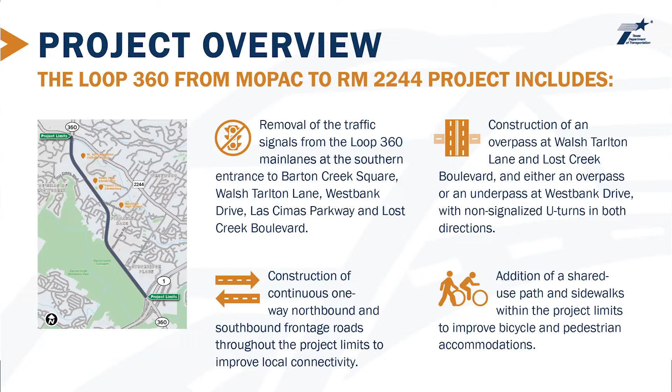As you know, Loop 360 has experienced a severe amount of congestion over the years, and as the population grows, that traffic is only going to get worse. This project will improve safety and mobility on Loop 360 between MoPac and RM 2244 by removing the traffic signals from the Loop 360 main lanes throughout the project area and replacing them with overpasses or underpasses at Walsh Tarlton Lane, Westbank Drive, and Lost Creek Boulevard. Constructing continuous one-way northbound and southbound frontage roads to improve local connectivity, and adding shared use paths and sidewalks to improve bicycle and pedestrian accommodations.

During this presentation, I will be giving you an overview of the Loop 360 program, public feedback and schedule to date. We will be walking through proposed details of the project. And this information can all be found on the Loop 360 website, which is loop360project.com. Your input is extremely valuable to the team, and there are 4 different ways that you can comment.

Comments can be received either online at the Loop 360 website, via email, verbally by calling 512-904-3800 and leaving a voice message, or by mail at the address on your screen. Comments must be received by July 23rd, 2020 to be considered part of the formal comment period.

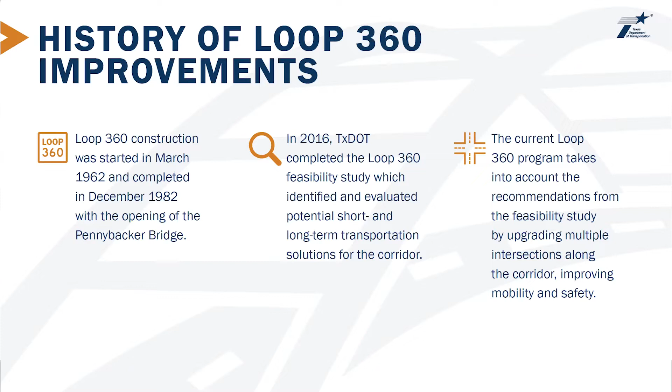Loop 360 has been around for nearly 4 decades. Construction was completed in December of 1982 with the opening of the Pennybacker Bridge. In 2016, TxDOT completed a feasibility study which identified transportation solutions for the corridor. The current Loop 360 program takes into account the recommendations from the feasibility study by upgrading multiple intersections along the corridor to improve mobility and enhance safety.

Community input is also an important part of the process. Through public workshops and meetings with neighborhood and business groups, we've heard the community wants the Loop 360 program to improve mobility and safety for all users, minimize impacts to the environment and the community, balance the needs of through traffic with local access while reducing cut-through traffic in neighborhoods, and address delays at signalized intersections.

Loop 360 experiences some of the heaviest traffic congestion in the area, especially during peak hours. A 2014 traffic study found it took approximately 70% longer to travel on Loop 360 during peak periods compared to free flow conditions. And if nothing is done by 2040, morning peak travel times could increase by an average of 46%, and evening peak travel times could be nearly double the off-peak travel times. Loop 360 from RM 2244 to SH 71 is among the top 100 most congested roadways in Texas. Unless something is done, traffic conditions will get worse as our population grows.

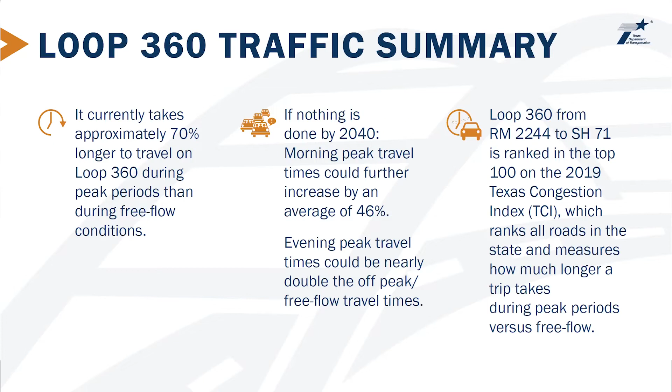The big question most people have is, when will construction begin? Take a look at our program schedule. The map to the right shows the 10 intersections where improvements will be made. They are grouped together into several different projects. We've already started utility relocation on the Westlake Drive Cedar Street project, and construction will begin in 2022. This intersection experiences the most congestion and is the first to move forward. We've ordered the rest of the projects accordingly. As you can see, improvements to the RM 2244 intersection will be handled as a part of a separate project in the program. Environmental work on the MoPac to RM 2244 project began in late 2019.

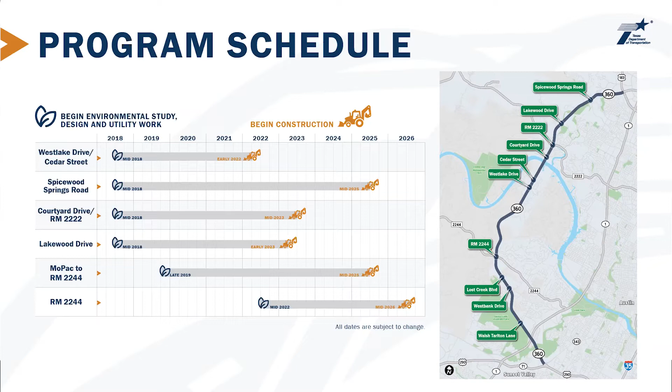We received many questions as to why it takes so long for TxDOT to complete construction for transportation improvements. The Loop 360 program began with the feasibility study, which took 2 years to complete. The next step is planning, environmental, and detailed design, which typically takes between 2 to 4 years to complete. During this part of the project, our team analyzes multiple alternatives, reviews the final version, and comes to an environmental decision. It usually takes about a year for utility relocation. Then the project can move to construction, which typically takes between 2 to 3 years, depending on the project.

I'm going to give an overview of the project and explain its main components, and later we'll take a zoomed in look at the major intersections of the project area. The project runs from MoPac on the south side to RM 2244 or Bee Caves Road on the north side.

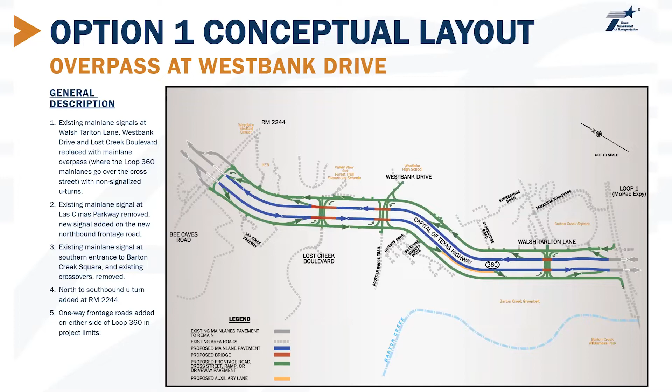Addition of a shared use path and sidewalks within the project limits to improve bicycle and pedestrian accommodations. Option 2 includes all the same things described for option 1. The difference is that option 2 adds an underpass where the Loop 360 main lanes will go under the cross street at Westbank Drive.

Let's talk about how you get from place to place as you drive along Loop 360 in the future. If you're headed southbound on the main lanes, the first exit you would come to, just after you cross over RM 2244, would put you on the southbound frontage road. From there, you can access Las Cimas Parkway, Lost Creek Boulevard, Westbank Drive, and Scottish Woods Trail. As you continue southbound, the second exit allows you to access the Walsh Tarlton Lane intersection as well as southbound MoPac.

If you're already on the frontage road and just want to get onto southbound Loop 360, there are entrance ramps just south of Las Cimas Parkway, south of Westbank Drive, and just south of Walsh Tarlton Lane. To access northbound MoPac from southbound Loop 360, you would stay on the Loop 360 main lanes and take a left at the MoPac intersection as you do today. To access southbound MoPac, you would exit north of Walsh Tarlton Lane and turn right onto MoPac.

If you're headed northbound on the main lanes, the first exit allows access to Barton Creek Square Mall as well as to Walsh Tarlton Lane. If you're coming from southbound MoPac already, you would already be on the frontage road and could easily access the mall and Walsh Tarlton.

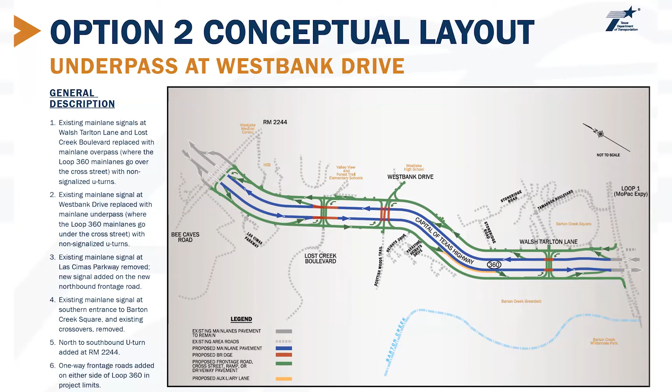As you can see, the MoPac at Loop 360 intersection hasn't changed too much, and you'll still be able to access MoPac very much like you do today. The current project ends at MoPac, so anything south of that won't be considered as part of this project.

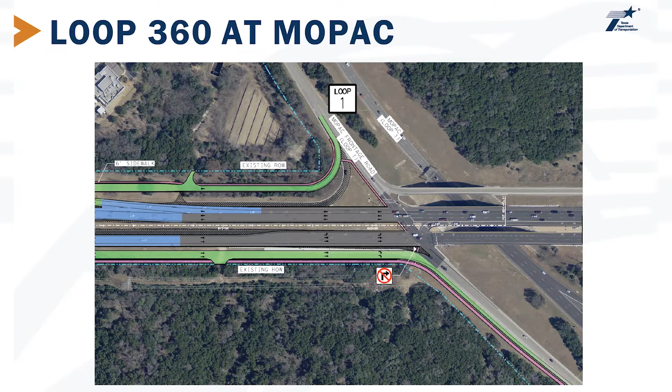An overpass with non-signalized U-turns is proposed for Walsh Tarlton Lane. There are 4 lanes on the northbound frontage road of Loop 360 and 3 lanes on the southbound frontage road. At this point, the shared use path is on the west side of Loop 360. We did that in order to connect the shared use path to existing bicycle and pedestrian facilities on MoPac. On the east side, a sidewalk provides access to Barton Creek Square Mall and connects to the existing sidewalk on Walsh Tarlton Lane.

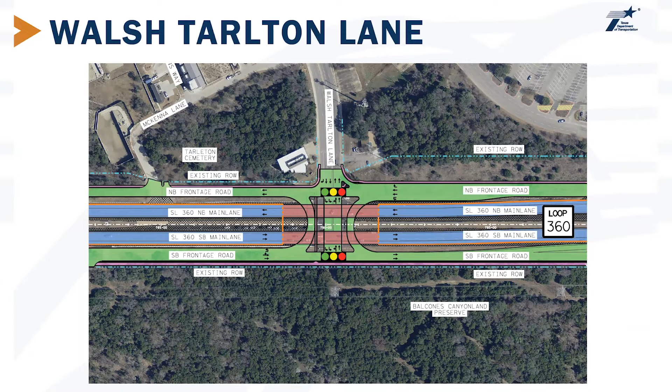Either an overpass or underpass with non-signalized U-turns is proposed for Westbank Drive. The example on the screen shows the overpass option, and this slide shows the underpass option. Regardless of the type of bridge we build, there will be 4 lanes on the northbound frontage road of 360 and 5 lanes on the southbound frontage road.

As you are approaching Westbank Drive from the south, there is a right turn lane that allows for easier, safer access to Westbank Drive. You will note a sidewalk on the east side of Loop 360 and the shared use path on the west side.

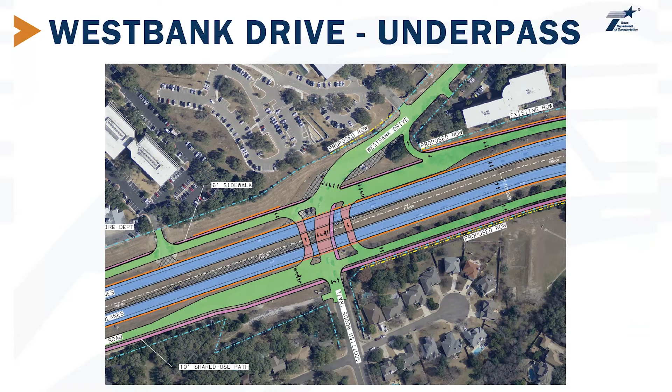Most of you will recognize this intersection as being the one that provides access to the Eanes ISD Administration Building and Westlake High School.

An overpass with non-signalized U-turns is proposed for Lost Creek Boulevard. This intersection experiences more traffic than Westbank Drive or Walsh Tarlton Lane, so for that reason, we are including 5 lanes in either direction on the frontage roads.

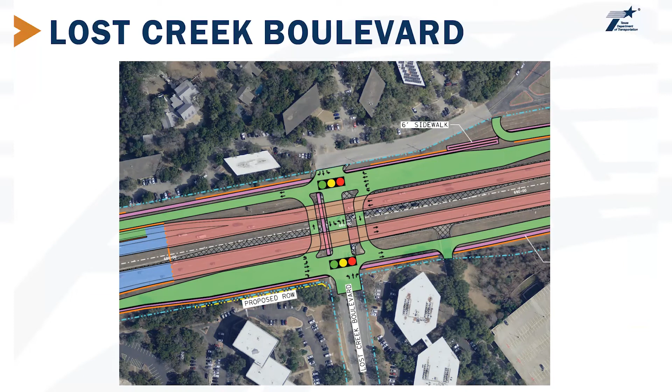North of Lost Creek Boulevard, we are adding a shared use path on the east side of Loop 360 with a sidewalk on the west side. The shared use path and sidewalk switch at Lost Creek Boulevard to provide connectivity with the existing shared use path at MoPac, as I had mentioned before.

From there, drivers can either choose to access the Village at Westlake Shopping Center and the HEB, or they can use the entrance ramp to travel northbound on Loop 360, or they can continue and access RM 2244.

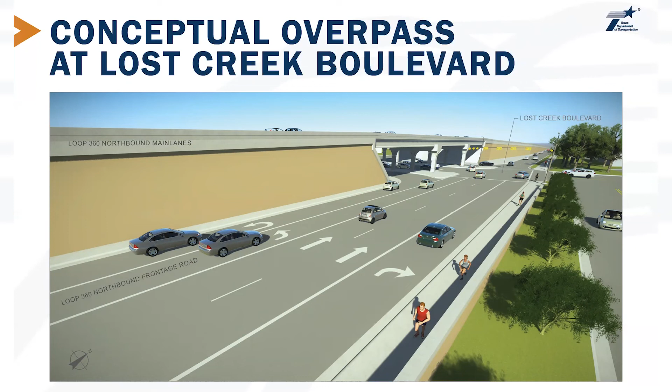We also plan to include this right turn only condition here at Lost Creek Boulevard, allowing commuters to arrive at Valley View Elementary, Forest Trail Elementary, or Westlake offices located here.

The project will add a northbound to southbound U-turn at RM 2244. Additional improvements to the RM 2244 intersection will be considered as part of a separate project.

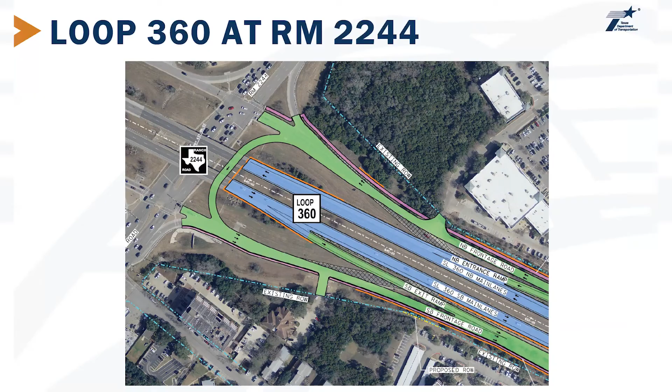If you'd like to take a closer look at any of the intersections, visit loop360project.com to view and download the exhibits. So what will this project and others look like when completed?

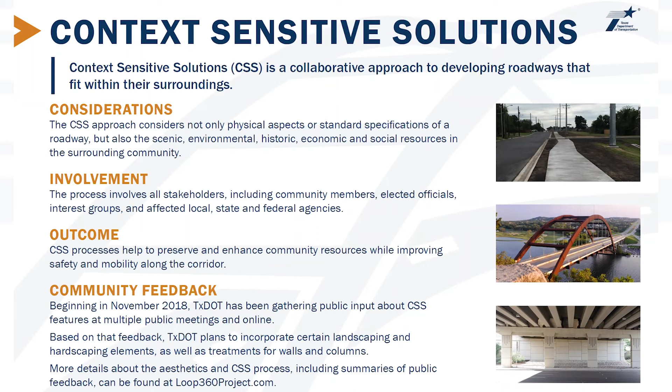TxDOT uses an approach called context-sensitive solutions, or CSS, which helps us develop roadways that fit in with their surroundings. In November 2018, we started asking the community what they'd like to see.

Based on that feedback, TxDOT plans to incorporate certain landscaping and hardscaping elements, using native grasses, wildflowers, and plants along the center median and more structured planting near intersections.

Hardscaping finishes will include muted colors with simple accents to maintain the natural look of the corridor. The project team proposed Cobra head light fixtures with low intensity LED bulbs to be installed at intersections and on ramps only.

This helps us maintain the night skies while still providing necessary safety lighting.

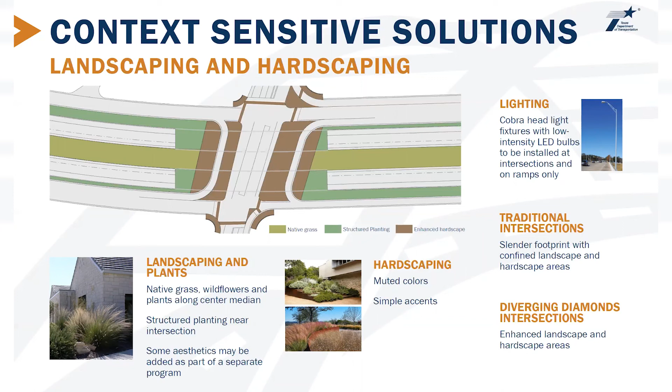TxDOT has also developed the design for walls and columns. Public input suggested using square columns with a Texas star emblem.

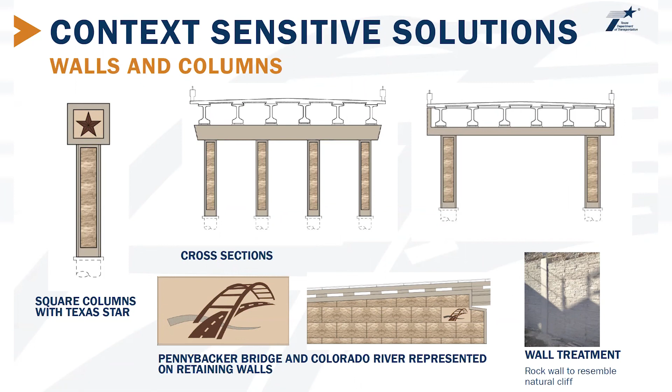In areas where a retaining wall is needed, the community requested that the wall resemble the natural cliffs seen now along Loop 360. An image representing the iconic Pennybacker Bridge will also be included on the retaining walls.

TxDOT appreciates the time you've taken to visit our virtual workshop. As I mentioned before, if you'd like to take a closer look at any of the boards or exhibits I have discussed here...

Just head over to loop360project.com to download those materials. You will also find fact sheets and a list of frequently asked questions that will give you even more details than I've been able to provide here.